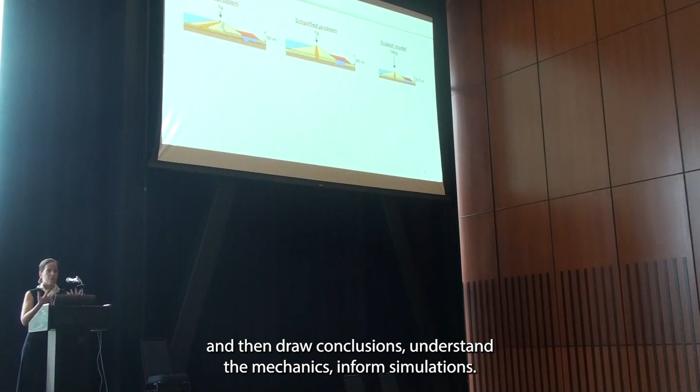Our lab, I'm going to show that in some of the later slides, but the idea is the same. We have a field problem that is challenged with certain issues, and the overarching purpose of hypergravity experimentation is to enable us to expand the range of conditions in a more simplified configuration, and then draw conclusions, understand the mechanics, inform simulations, this has been mentioned before, and upscale back to the field.

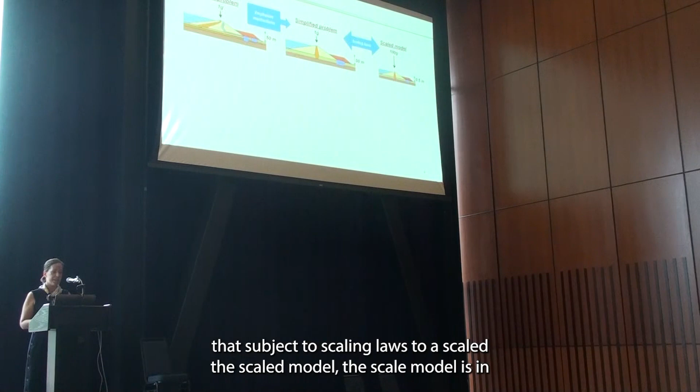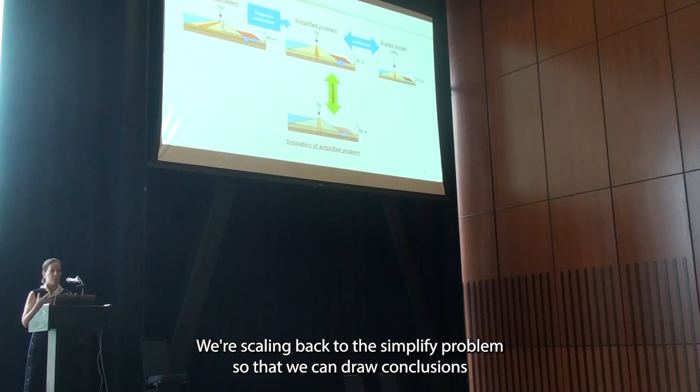So progressively in the slide, I'm going to go from the field problem. This is typically simplified in a problem first in 1G that is emphasizing the mechanisms of interest, and then with hypergravity experimentation, you reduce that subject to scaling laws to the scaled model. The scale model is in turn subjected to a broad range of loading paths and conditions such that we can draw conclusions on the mechanics that are governing that system. We're scaling back to the simplified problem so that we can draw conclusions about the mechanics.

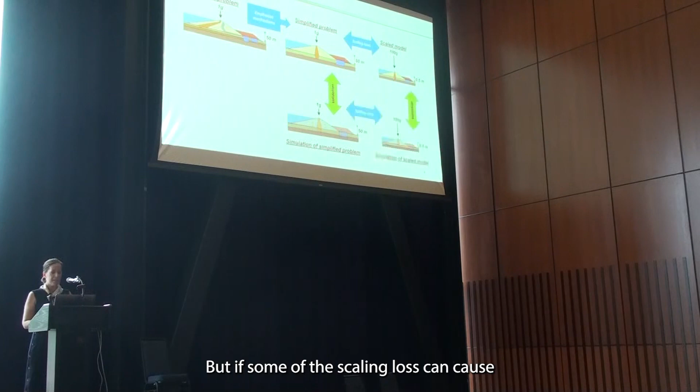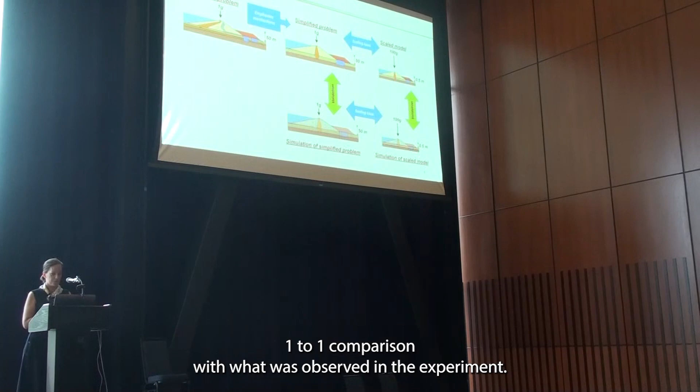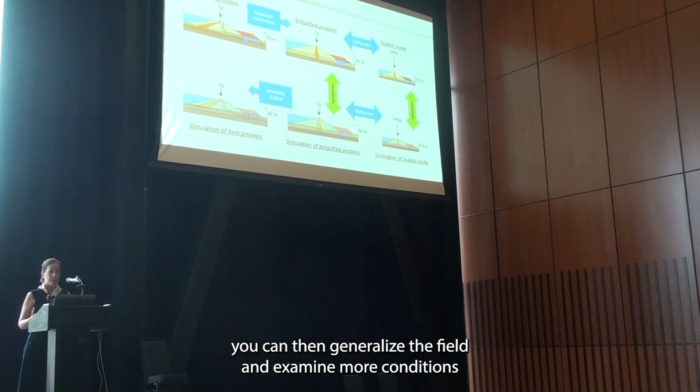Then typically validation is performed at the 1G scale just so that you have a nice touch with reality. But if some of the scaling laws can cause confusion, I'm not going to go into the details of that. Simulations can take place in the reduced scale model and have a direct one-to-one comparison with what was observed in the experiment. Having understood all the mechanics and having developed confidence in your tools through the validation, you can then generalize to the field and examine more conditions. And this is not dissimilar to what we have heard so far.

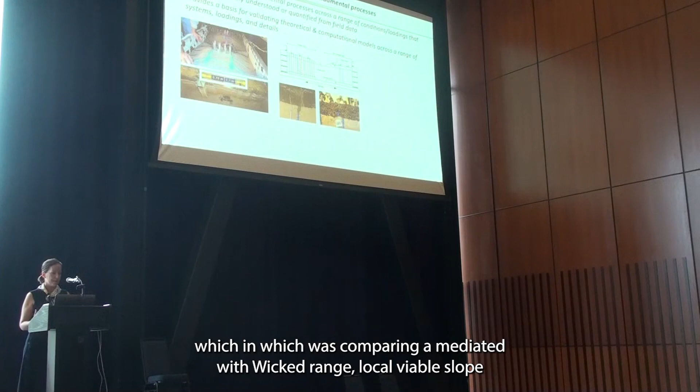So the 2 points for scaled modeling is that we can understand fundamental processes and we can have a basis for validating theoretical and computational models. I'm showing some pictures here from an old project which was comparing a liquefiable slope mitigated with wick drains and a liquefiable slope with no mitigations, and seeing how the wick drains can assist in the dissipation of pore pressures and through that reduce the observed displacements.

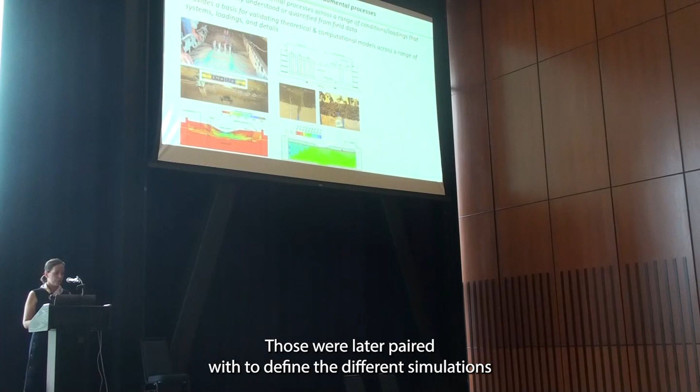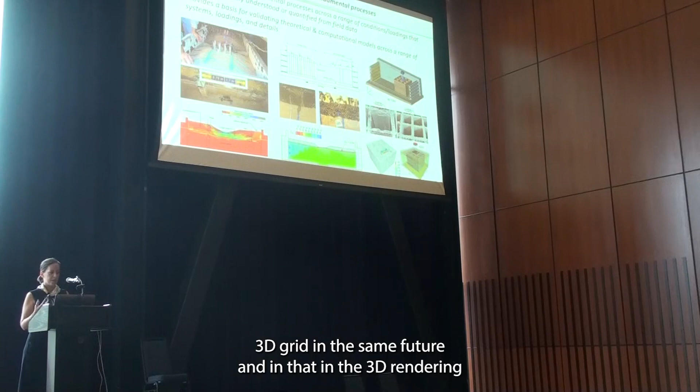Those were later paired with 2D finite difference simulations that were validated against the tests and then expanded to more conditions. This is an exercise that keeps happening again and again. In this example, on the right, I'm showing a DSM 3D grid in the centrifuge in the 3D rendering, some of the excavated views of the DSM grid, and then 3D simulations.

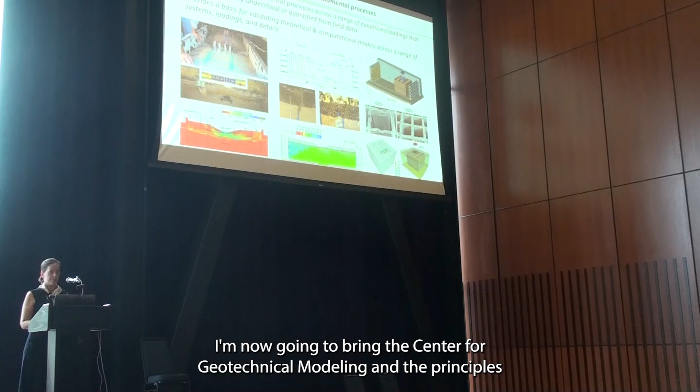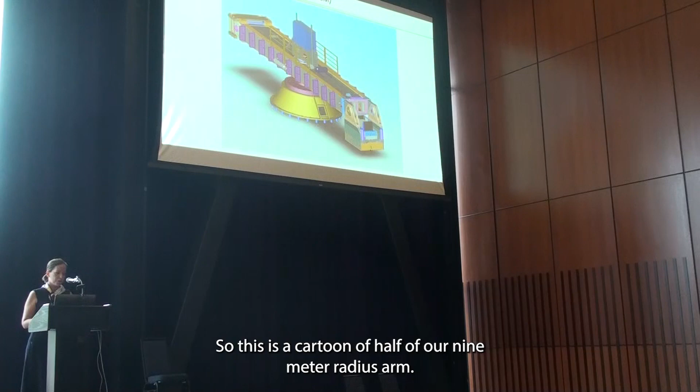Just to bring everyone on the same page, I'm now going to bring the Center for Geotechnical Modeling and the principles of hypergravity testing into this slide, which comes to resolve the need to mimic the gravity conditions that are particularly important for the behavior of soils. So this is a cartoon of our 9-meter radius arm. This is going to spin around its center axis. It has a 9-meter radius.

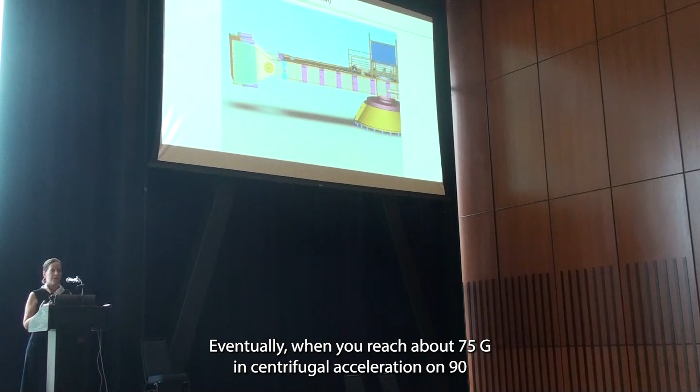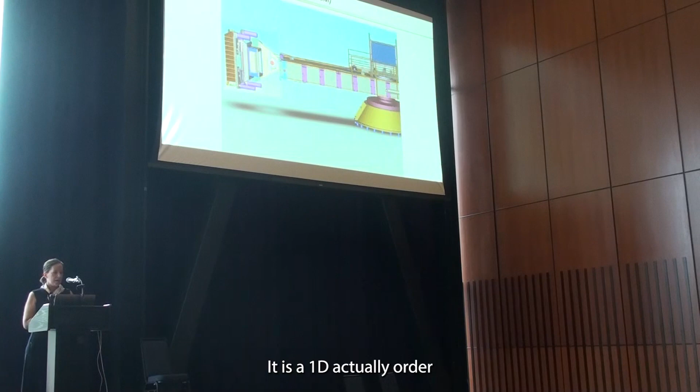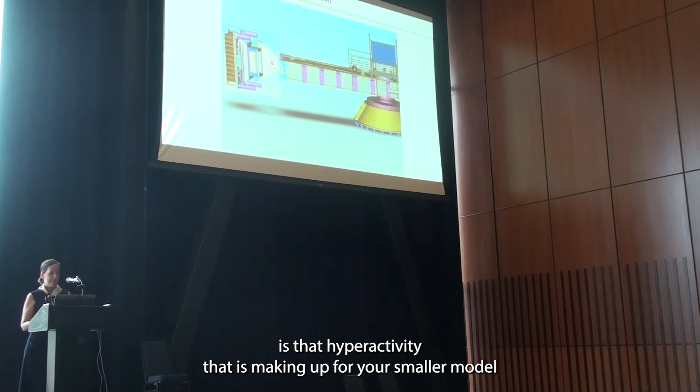Eventually, when you reach about 75 G in centrifugal acceleration or 90 RPMs, the box will raise around that pivot point, and inside you can have the model resting on a shaking table. It is a 1D actuator, so we can apply motions up and down in the slide as you see it right now. And the principle is that the centrifugal force is that hypergravity that is making up for your smaller model and bringing in the overburden that is so important for all soil structure systems.

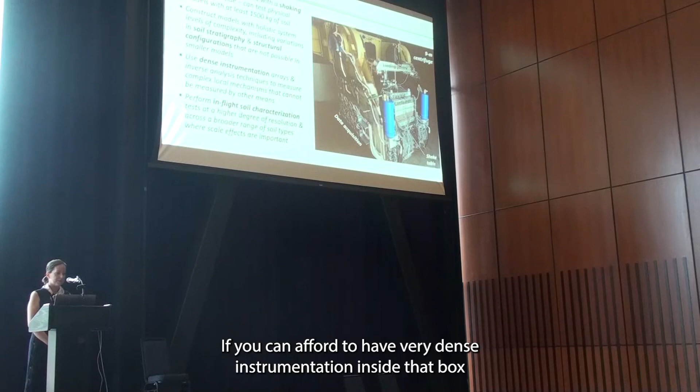You can afford to have very dense instrumentation inside that box, from pore pressure transducers, accelerometers, LVDTs. We have developed new methods for tracking displacements through cameras, and also you can perform in-flight soil characterization to provide lots of resolution in what you have in your container, in your soil, both before shaking, for example, and after.

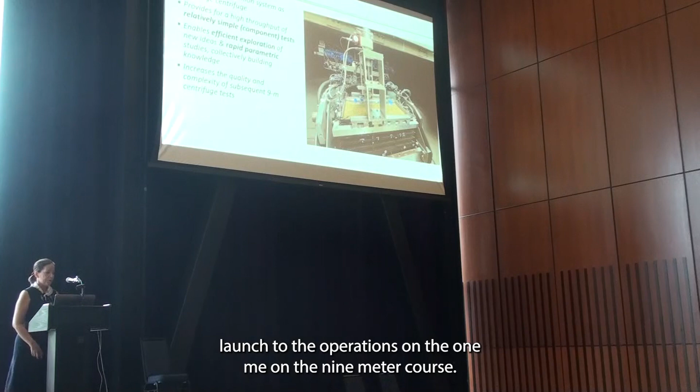Lots of the operations on the 9-meter centrifuge are supplemented and enabled by tests on the 1-meter centrifuge. I'm showing here a picture. It's a close-up view where we were looking at bioremediation of liquefying sands, and now this type of testing has been upscaled to the 9-meter centrifuge enabled by the testing here.

It has the exact same data acquisition system, just you have an order of magnitude less instruments, but the point here is that we do not have to maintain unique sensor inventories. You can do efficient exploration and some rapid parametric tests. It's much faster and cheaper to do tests on the 1-meter centrifuge, and through that you can increase the quality and complexity of the subsequent 9-meter tests.

What are some common traits for successful projects? It always has to do with starting from what you want to study. What is the mechanism you're trying to resolve? What system behavior do you have your eyes on? And this has to be articulated through deciding, do you want to validate numerical simulations? Do you want to validate design methodologies or revisit them? Or do you want to simply identify mechanisms and behaviors to do later inverse analysis through those?

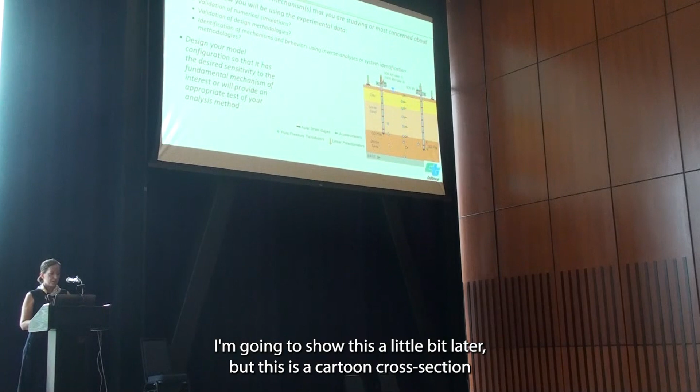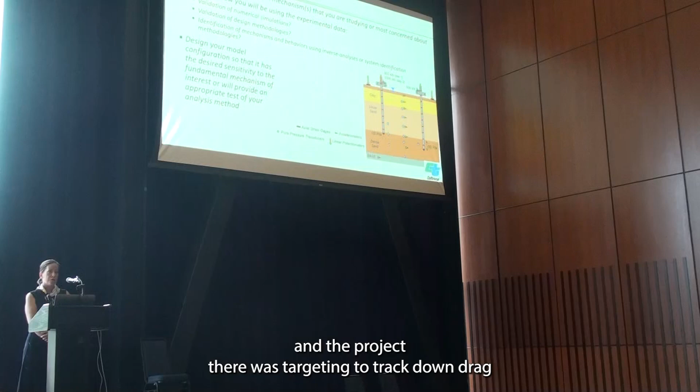Ultimately, the model that is designed has to be emphasizing the mechanisms. It has to be simple, not too simple, to bring out the mechanisms of importance. I'm going to show this a little bit later, but this is a cartoon cross-section of a project we wrapped up a couple of years ago with Bruce Kutter and our former student Sumit, funded through Caltrans. And the project there was targeting to track down drag on piles as imposed through the reconsolidation of liquefiable layers.

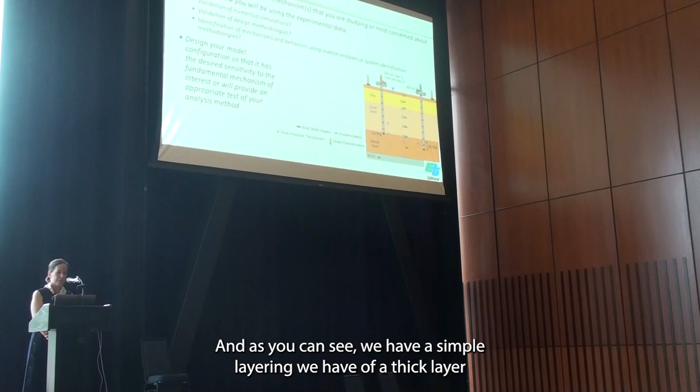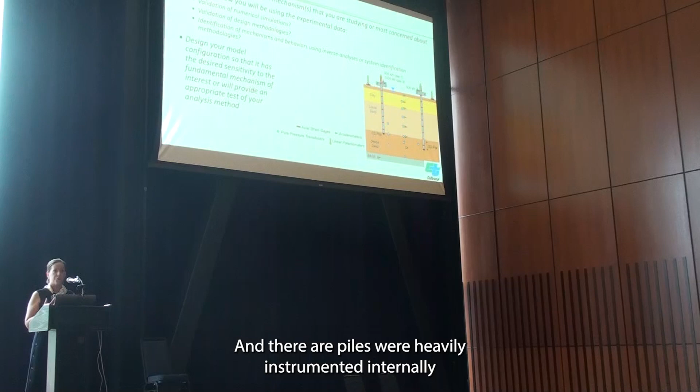And as you can see, we have a simple layering. We have a thick layer of loose sand. We wanted that layer to liquefy and bring out all the reconsolidation it could do afterwards. And then our piles were heavily instrumented internally so that they can track all the behavior across their length. And then the free field was also heavily instrumented to track at every depth what was happening in terms of pore pressures and accelerations.

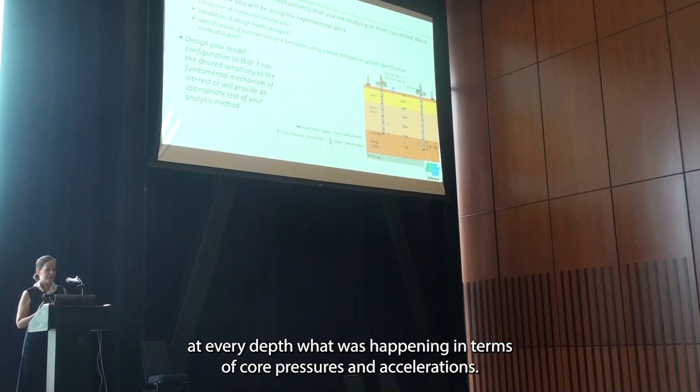How can you have access to the centrifuge? As you stand right now, you all have access to it. All of us are always available to chat. We have a mentors program. You can see a long list of names who are great past users and current users of our facility, and all of them have pledged they're available to help and guide you through the process. All of our reports and data are available on the CGM website and increasingly now on NHERI DesignSafe.

And the goal there is for you to find reports that are very, very carefully documenting every part of a test so that you can learn from it before you start thinking about your own tests. We have sample data and codes there to enable processing and getting some hands-on idea of what you expect to get from the test. The facility, as I showed it, enables some parallel workflows so that we can maximize the usability in there.

And because students are ultimately doing the work, we have established ladder mentoring practices whereby we try to partner students. The recharge rates also reflect that. We encourage teams to be partnering up and mentoring each other so that the students increasingly become capable of leading the test that is later coming down the line. We are advancing our onboarding procedures, and most importantly, we offer customization.

So the CGM supports its users in developing, commissioning, and using new experimental techniques that are always in the forefront of the field of physical modeling. So no experiment we ever see is similar to the previous ones, and there's always a different need, whether that's in the protocols you follow, in the equipment you need, in the instrumentation you need, and the monitoring you're gonna do. Three examples that I have, but there's plenty. Every test has had something new come to it.

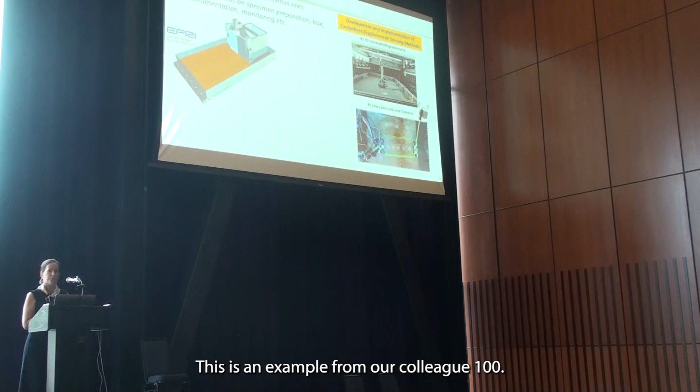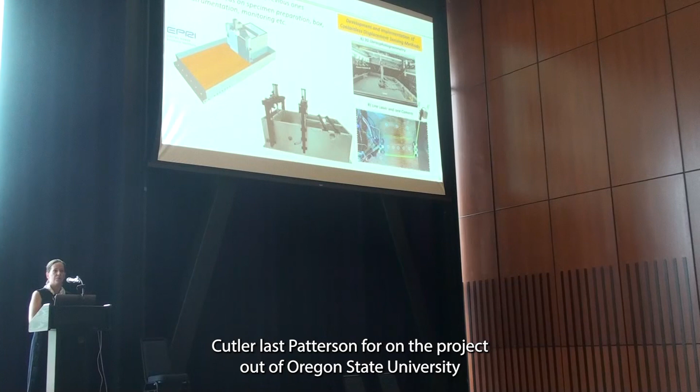I mentioned it before. We have developed a method for doing 3D stereophotogrammetry with the TEMA software and some high-speed cameras. That now has been established and has been used by at least two more teams at the centrifuge. We have had customized boxes. This is an example from our colleague Alejandro Martinez and his project from EPRI on runout behavior of impoundments. This is the tsunami tank developed back in the day by Bruce Kutter and Lars Pedersen for a project out of Oregon State University. And this is just to name a few.

A point on technology transfer, which is important for PEER. We have seen great success, and it's a goal if you want to have impact to do technology transfer. We have seen that this is quite successful when you partner early on with interested stakeholders or early adopters on the research team or target resolving a current concern in practice. And we have seen impacts on documents by Caltrans and other professional society committees.

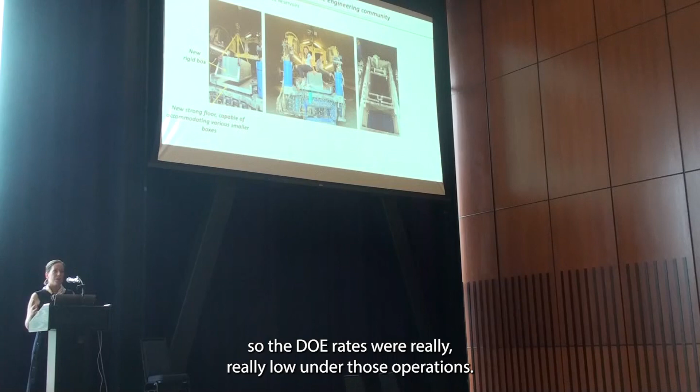I'm going to show two examples, and these are projects I have been involved in because that feels more comfortable to talk about. This is a project funded by NSF, so the rates were really, really low. Under those operations, the cost for NSF-funded projects is minimal. That was a test aiming at studying soil-structure-water interaction effects in buried storage tanks, and we did it in two phases. The first phase was a very simple box that I'm showing here.

That was a new rigid box that we mounted on a new strong floor that we have, so it's smaller than the typical laminar boxes that we have there. The strong floor in combination with smaller boxes allows for quicker tests and mounting different configurations. So this is how it shows on the arm, and we filled it up with water at different elevations. We instrumented it internally, and we basically excited hydrodynamic loading to understand what we can afford in terms of scaling and sizing inside the arm.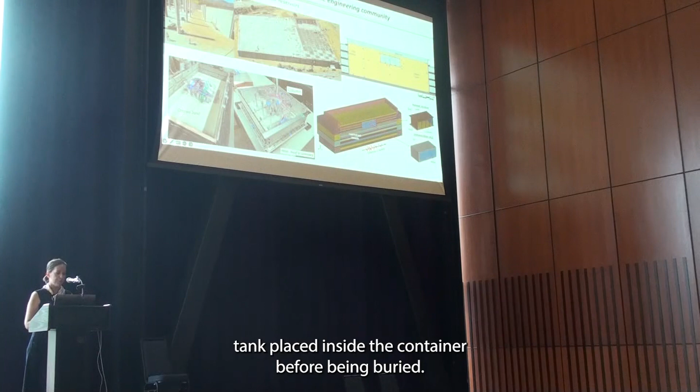In the second phase of this test, we came closer to reality. We aimed to represent some of the most recent constructions of buried storage tanks. I'm showing here the Headworks East Reservoir in LA. I'm showing here a simple cartoon of how it looked in our centrifuge. The instrumented model tank placed inside the container before being buried, and then we performed 3D numerical simulations to validate the test and then expand to other configurations. So that was from NSF.

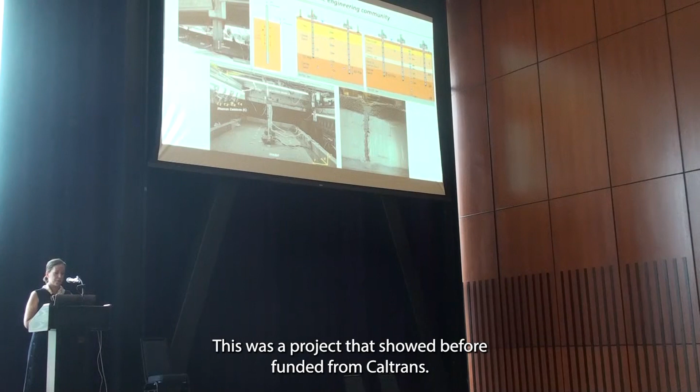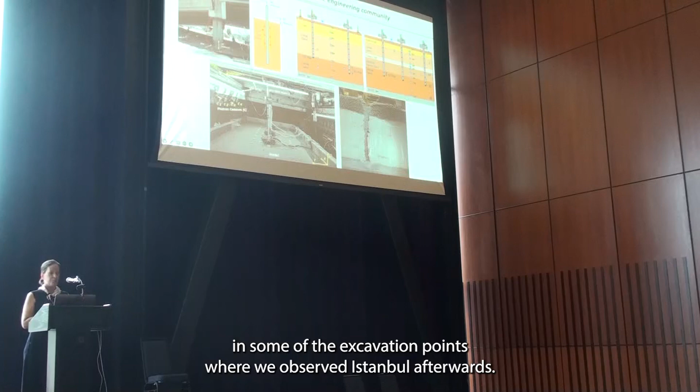This was a project I showed before, funded by Caltrans. Also two series of centrifuge tests. The one I showed before had a simple profile. Then we moved on to something more complex, having established that we can measure the types of responses we were interested in. This is a configuration with the cameras that I showed earlier and some of the excavation points where we observed the sand boil afterwards.

Everything has its price, as was mentioned before. There are ways to get a lot of mileage from the centrifuge. So I want to say again, it's not free, it's open for use by all. Our recharge rates are published on our website, and you can find lots of the details as they pertain to the facility. The recharge rates are from 2015. We're looking to update them, so stay tuned for that. If you have an NSF project, Jason is going to talk about one such example later. You can use PEER funding to, say, cover students, because the tests can be covered through NSF. Those are different things you can do there.

CGM is there to provide guidance, training, and support for our diverse user base. We have a workshop on the 12th and 13th of October. The call has been emailed and posted, I think, on the NHERI DesignSafe website. You can attend in person or online, and we'll be very happy to see you there and chat today or any other time about exploring possibilities. With that, I want to thank you and welcome any questions.